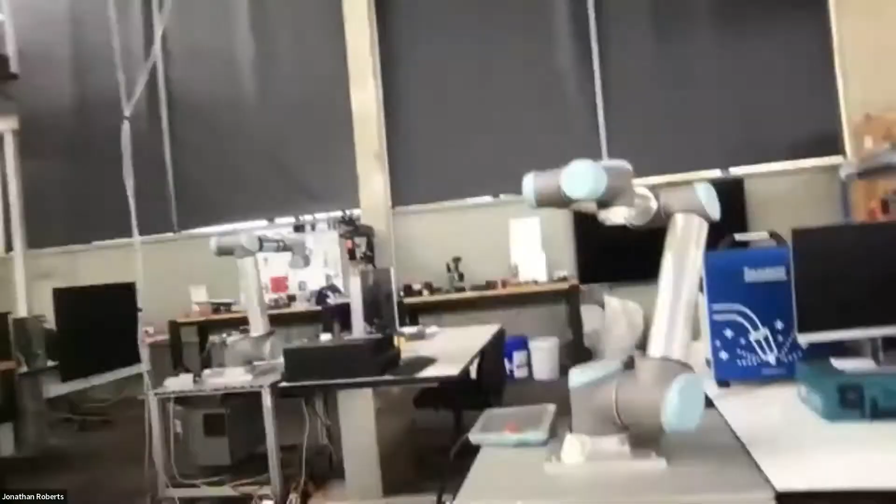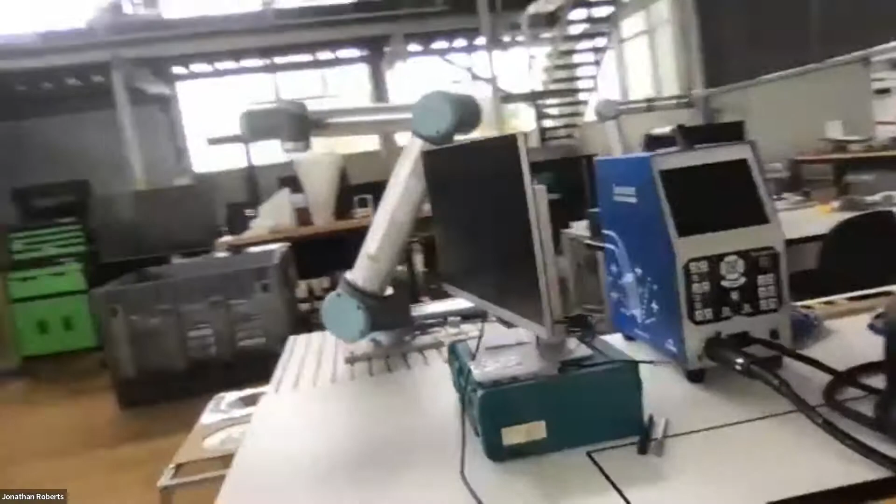Okay, so this is our prototyping space where you will see some things that you probably do recognize as collaborative robots. So these are relatively small robot arms that are sold as collaborative robots, meaning that they are relatively safe to have people nearby. So we've used this space to test new techniques. In fact, you'll see some Weld Australia provided kit over here. So Weld Australia are one of our partners. You can see their augmented reality systems, which no doubt many of you have used. We won't talk about them in detail now.

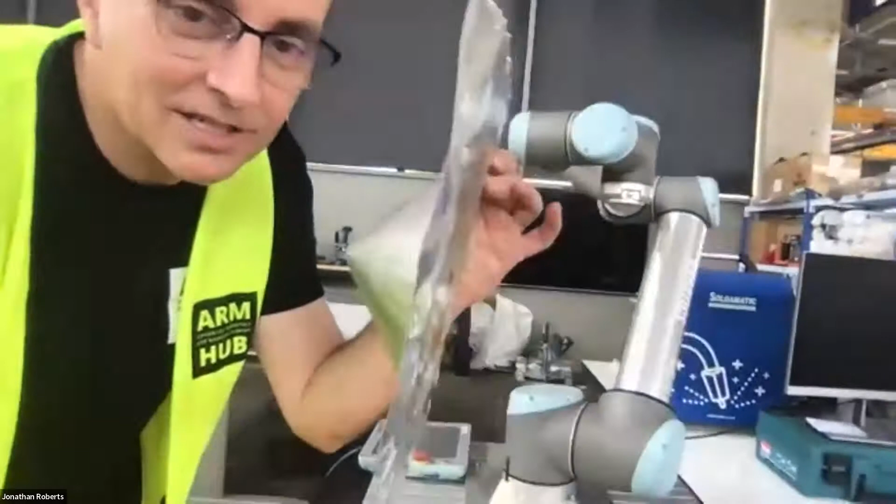I just want to show you a couple very quick projects. This robot here has been used for a thing called incremental sheet forming. Believe it or not, this robot made this piece of metal here, this cone. This started as a flat sheet.

We've then put this pick on the robot, and it's just a steel rod with kind of a ball on the end, and that's used to press against the metal and do incremental sheet forming. So that's one example of where you would use a collaborative robot.

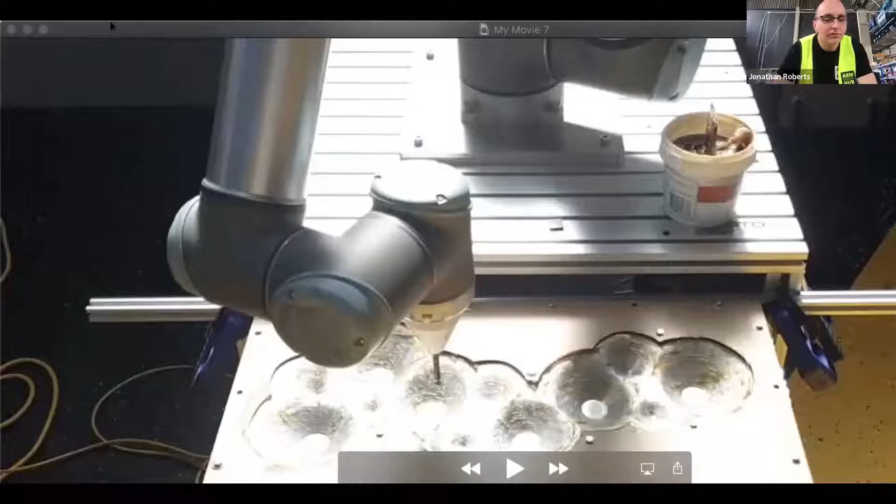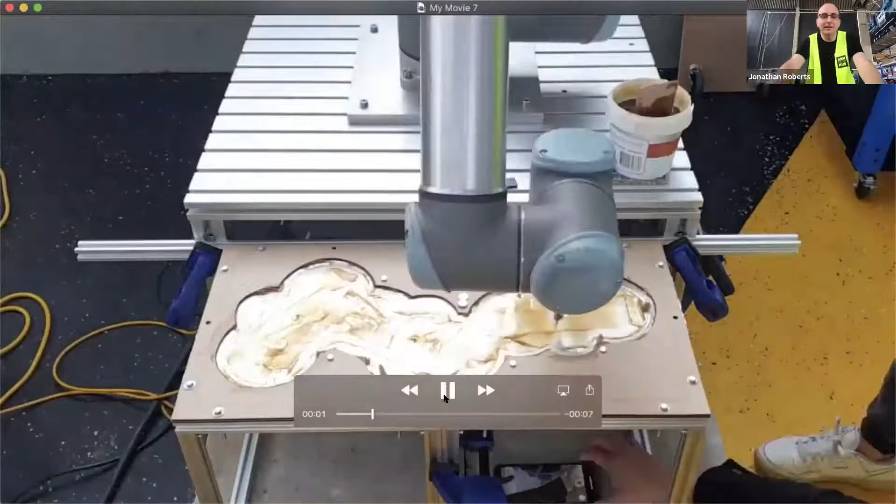I'm now just going to see if I can share my screen and show you a quick time lapse. Let's have a look, see if this has worked. Just bear with me for a sec. Okay, here we go. This is a time lapse of incremental sheet forming. Over about an hour, you can see this collaborative robot performing this task.

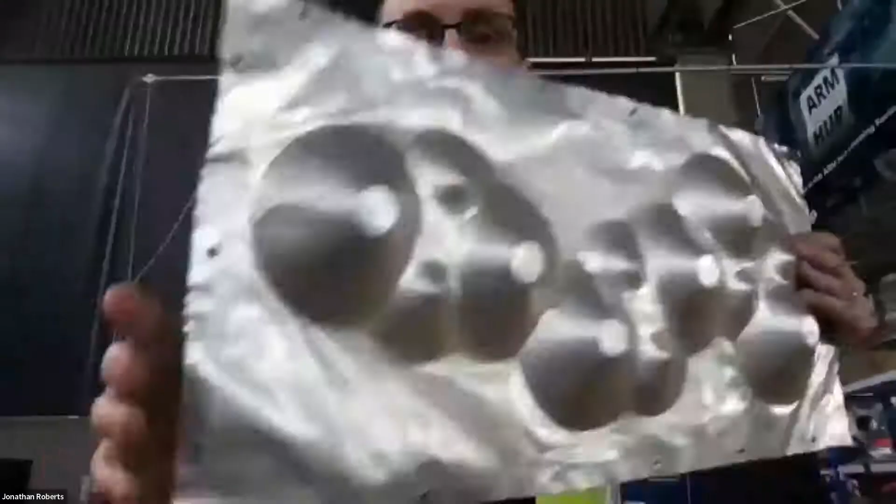These sorts of robots and techniques can be used for one-off things, which means people are still very much involved. In this case, someone is involved in the programming, and somebody tending to the robot, sort of lubricating things. This is the output of what you just saw in that video.

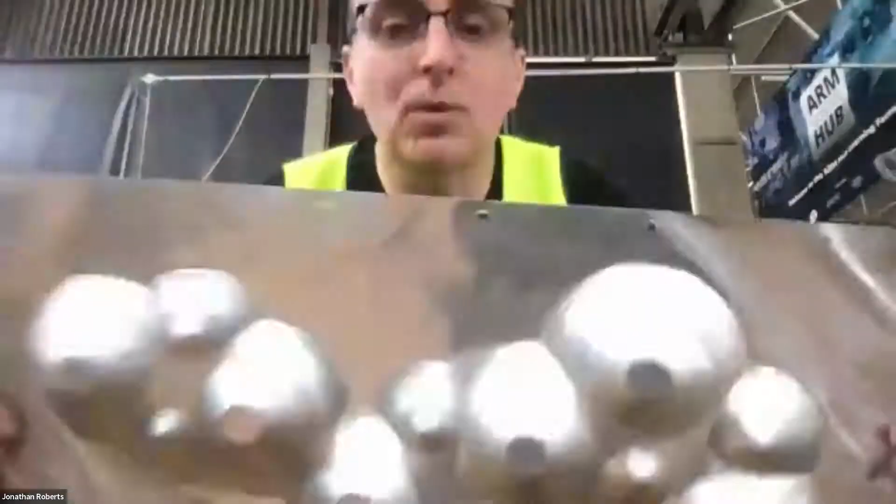This can be used for all sorts of different things. It could be used for decorative purposes, but probably these sorts of things are going to be used for molds. If you could lay composites in there, you can make composite materials with a couple of these sheets and other things in between. You can start to see how we're using these new types of robots to do different tasks.

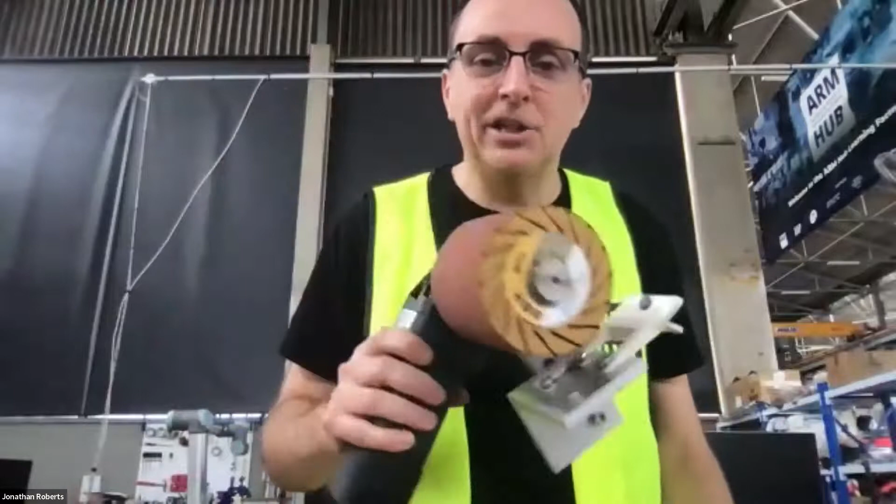Now I want to show you something that really got us inspired a few years ago. You can see this tool here, a linisher. Linishers are used by metal workers against a metal sheet. It's backbreaking work. It's the sort of job that the person who would normally do this manually can get a collaborative robot to do. Let me show you this project.

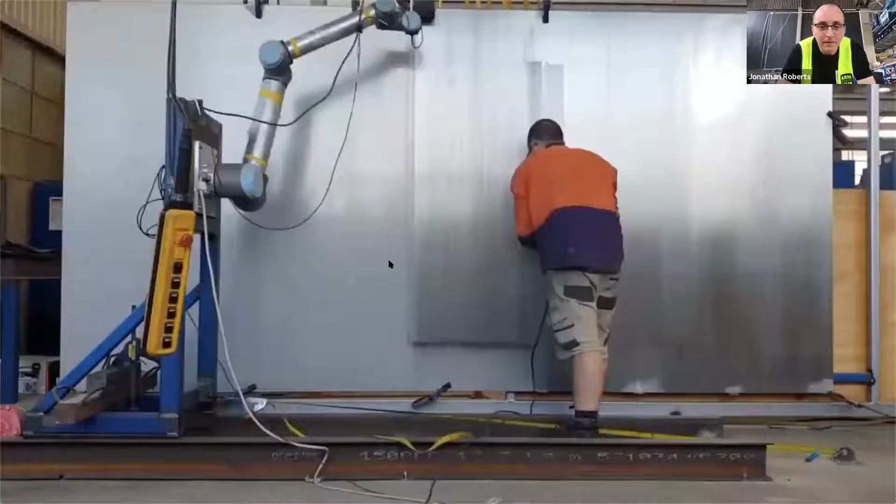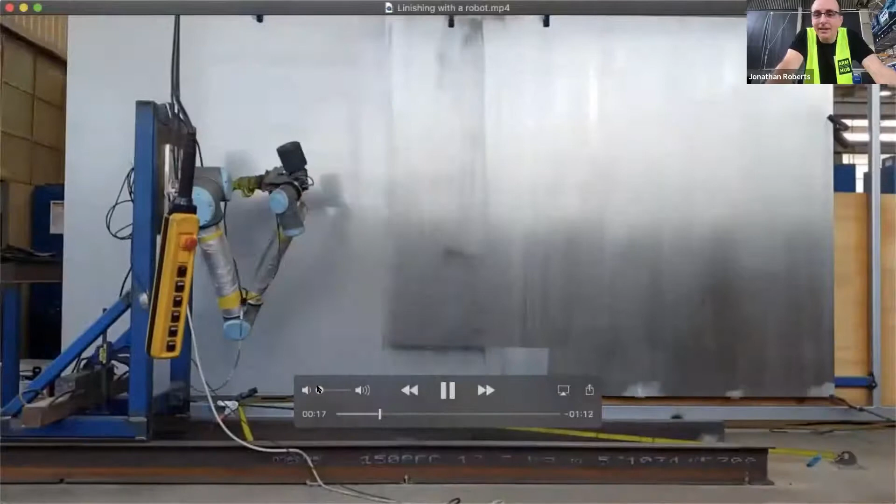Right, so you can see here a time lapse. This is a metal finisher, Matteo, who works in the shed next door to the ARM hub, at a company called UAP. He is working here alongside this robot.

He actually co-designed this solution with one of the ARM hub's engineers, who was working for QUT in a project back then called Design Robotics. She and him co-designed this whole system in the space of 3 days.

So they went from concept to this video in 3 days' time. They designed the brackets, they manufactured everything, they decided how to program it, and it took a job that would normally take him 24 hours on the tools down to about 8 hours in total.

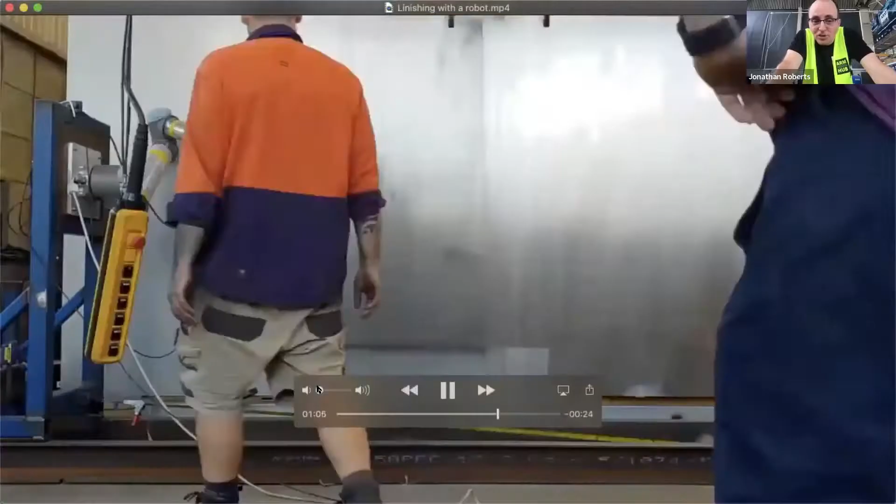And of that 8 hours, 6 hours was the robot, with Matteo tending to that robot. You can see him changing the sandpaper drums, lubricating the sheet, actually dragging that frame, because they only had 3 days they didn't motorize that frame, so he dragged it along sideways when it needed to move.

He spent 6 hours of that 8 hours doing that with the robot, and then he would spend 2 hours doing it the old way, fixing up the bits the robot missed. At the bottom of that video, there's a whole lot of missing spots because they didn't get it perfect the first time. So it went from 24 hours of him on the tools to 2 hours of him on the tools and 6 hours of him working with the robot.

And then they replicated that. I think they did 6 sheets for this particular job. So this is one of the prototype projects that showed us the benefits of these robots, and particularly working with the expert in whatever the trade may be.

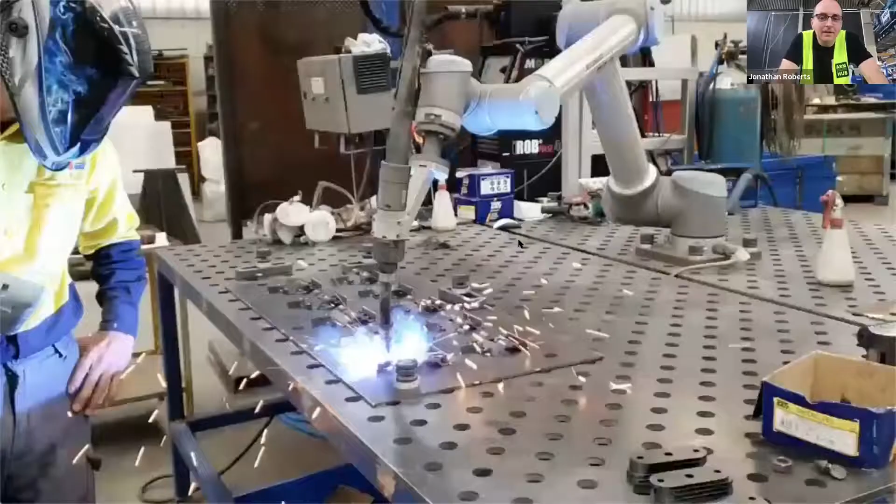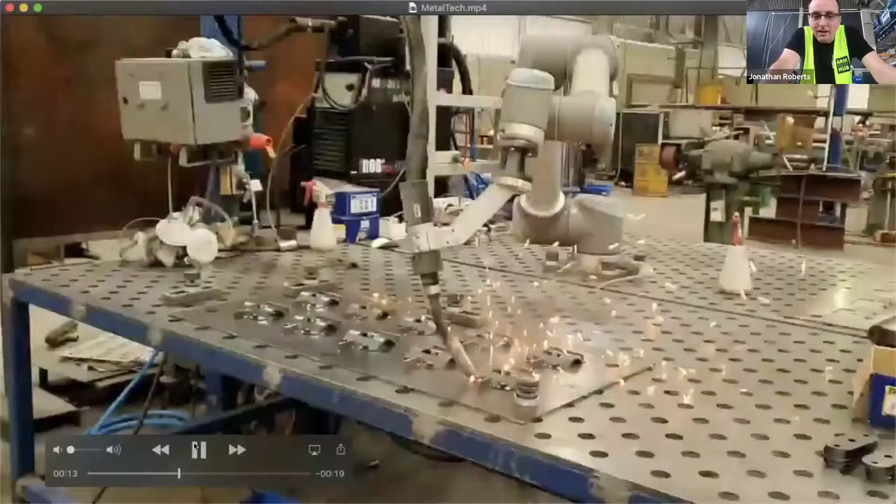Now, because you're obviously all interested in welding, let me give you another example, a welding example. This is a very similar project to the Linishing project, in that this company, MetalTech Industries, had a problem where they needed a collaborative robot to do this welding. In fact, the same engineer, Amelia, went to the company and helped them integrate this system. This was a 2-day piece of work.

Helped get the metal worker there up to speed with the programming, made sure that they understood exactly how to replicate that, and now they're using that in their business. So you can see, relatively straightforward, using these collaborative robots almost out of the box. You don't need much more special stuff rather than just a little bit of training, not a lot of training, to actually use these in a useful way. So they're now setting up this table here where while the robot's working on one side, somebody can be working on the other side, setting up the bracketry and that sort of stuff.

Okay, I'm going to stop the share there. And Merryn, if you could start the slides again, I'll give a bit of an introduction to the partners of the centre. So I think you get an idea now what a collaborative robot is in our terms. It's kind of anything where there's people that are sort of at the heart of it.

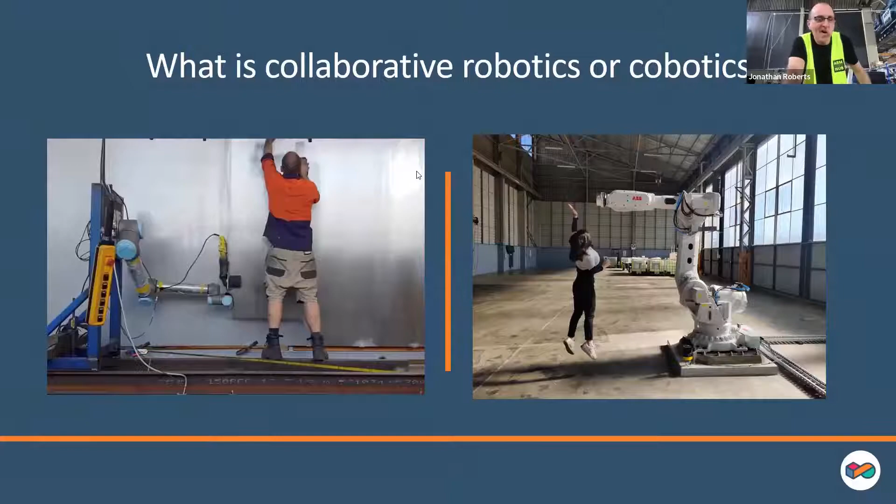Now, if we could get the next slide, please. Okay, slides are stuck. Do we need to start it again? I feel like one of those IT people. Can you turn it off and on again? Any luck? Merryn, do you know what's happening? Okay, I think it's coming up on my screen, but it's not on anyone else's. It is now here, finally.

Good, now it says our objectives. Is that what it says on your screen? Okay, all right, great. Okay, and now expertise. Okay, all right, let's stick with expertise.

All right, going quickly to the partners. So we have on the right there, you can see, so I am from QUT. We've also got university partners from UTS and Swinburne, and we've also got the Technical University of Dortmund in Germany. So they're the research side partners.

And then part of the centre, we have Weld Australia, hence this webinar, of course. We then have InfraBuild, we've got Cook Medical, who are a medical device company, we've got B&R Enclosures, who make all sorts of enclosures, boxes for all sorts of infrastructure projects. You may even have one at your house, it's very common for an Australian home to have their electricity meter in a B&R Enclosures box. Arm Hub, where I am today, and then IR4, who is a software company that makes smart software for the construction industry, particularly of steel buildings.

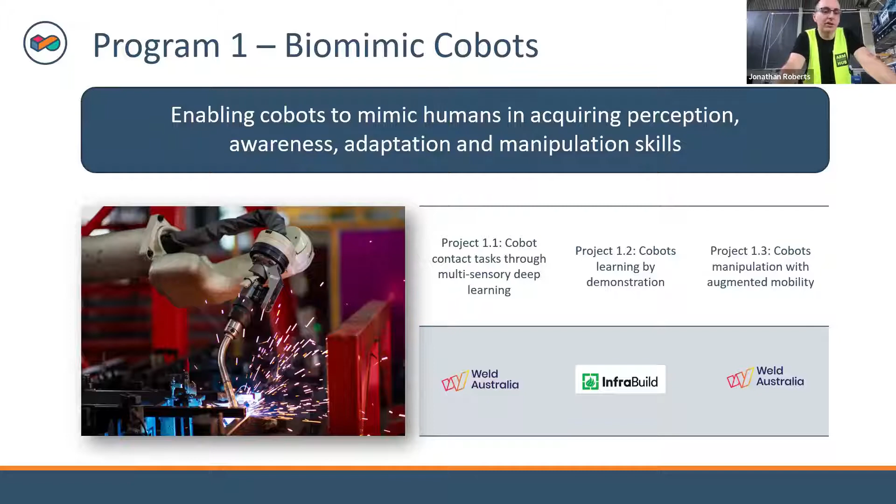So now I will hand over to Jared Donovan, I think, who is going to talk about program 2.

Thanks, John. Program 2 is about human-robot interaction. In our program, we're starting to look more at the human side and how you design these robots so they work better with humans in real work places. We've got 3 sort of research projects that we're working on.

The first one's called Human-Robot Interaction Intention Visualization. That's really the idea that we want human operators to be able to see what the robot might be thinking. This photo here is actually from a commercial product that's available now for forklifts, and it projects a simple beam of light of where that forklift is going. So we want something similar for robots, where if you're working alongside a collaborative robot, you can actually get a sense of what the thing is going to do. And that just, we believe, will help make that human-robot collaboration a lot more efficient.

The second one is a human-robot interaction prototyping toolkit. You can kind of think of this as like the Lego kit for making these new kinds of robot interactions. One of the things about robots is they're complicated, sophisticated engineering machines, and we need ways to test out these new ideas that's quick, efficient and lightweight. So like a Lego kit of parts, the idea is to make it easier to prototype and test new designs. The sort of thing we might do is actually create a virtual reality simulation of a robot before we test it out in the real world.

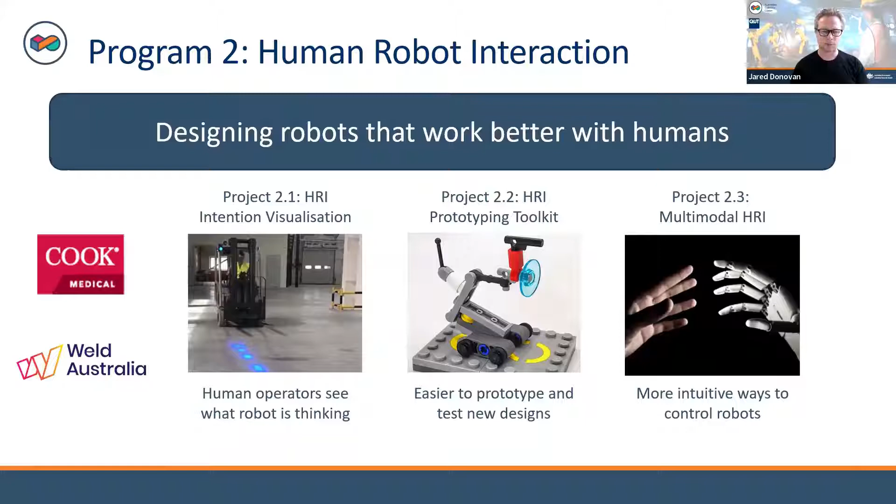Hello, everyone. Thank you. So program 3 is about designing socio-technical robotic systems. There are some overlaps with the other programs. This one looks at designing the manufacturing systems, the products, and the spaces that will help connect humans and robots to work together.

So the first project focuses really on human factors. In that project, we'll look at the knowledge, the interests, the motivation, but also how the human fits within that robot and manufacturing system to better create and develop these systems that address the needs of the people.

on the workshop floor. The second project is about design factors. Here we look at the needs of the human, but also the needs of the product, the workplace, and the cobot. And again, how do we create an environment? A spatial environment, but also what are the tools required to make the system work? And also other principles that will need to be implemented to really make the human and the robot work successfully on the workshop floor.

The third project is about AR and VR factors. So learning from the human factors and the design factors, we see that the AR, VR virtual space can be used to simulate, to prototype, to evaluate how these systems come together, and to really bring the human into exploring how the human and the robot can work together within that manufacturing context.

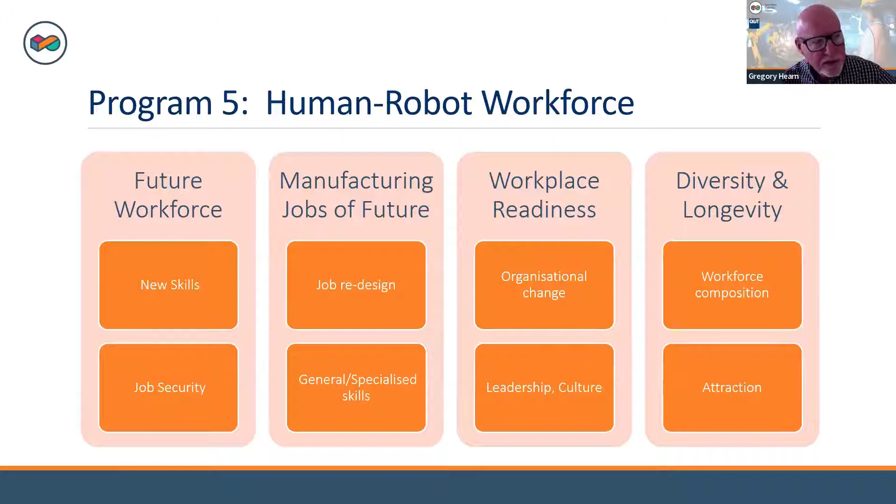We actually have a question here from David Wilton. David's question is he's interested in some of the things we've been talking about, and who should he be talking to about being an industry partner.

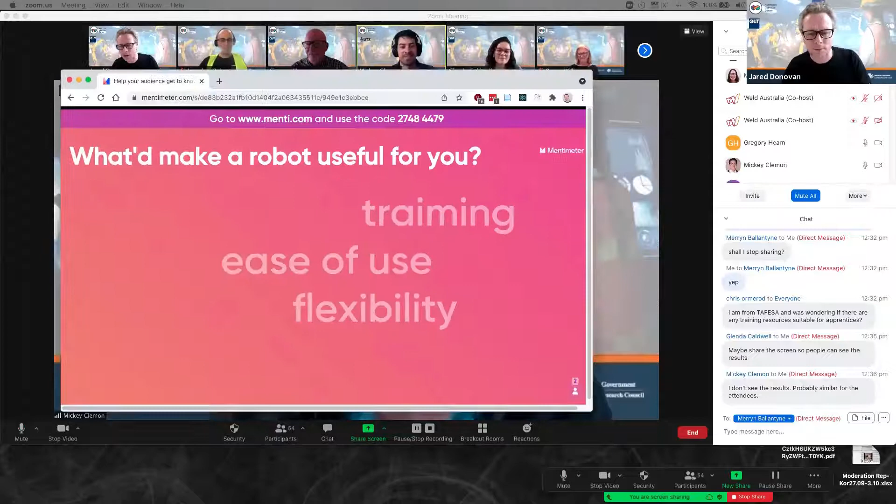All right, so the next one, again just to get the conversation started, the question here is: what would make a robot useful for you? When you click through, you should see 3 places where you can type in answers, but what are the things that would make a robot useful to you? Sorry, is that not showing up on the screen? Okay, thanks for letting me know, Glenda. Here we go, sorry about that everyone. Is that showing now? We see Greg, in your screen. No, okay, try again. Yep. Good, all right, that's better, thanks for letting me know. Zoom newbie mistake there. Okay, so yeah, what would make a robot useful for you? So far we've got training, ease of use, and flexibility. I'll post that link again in the chat.

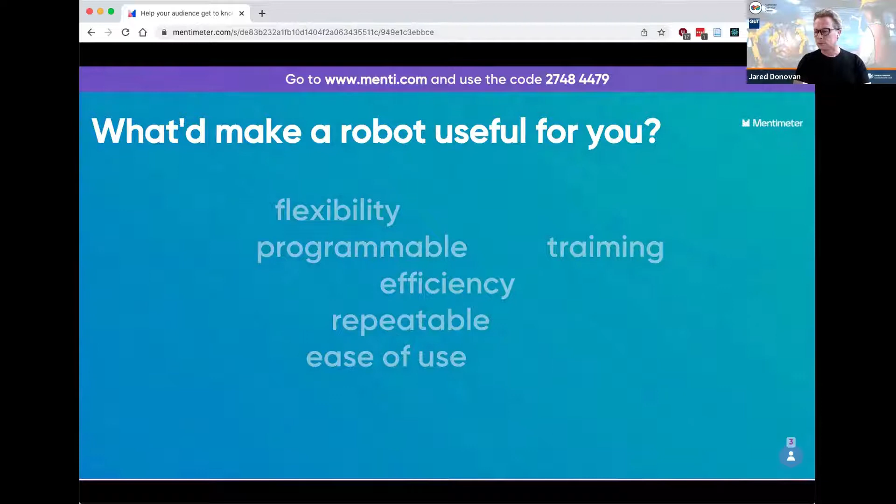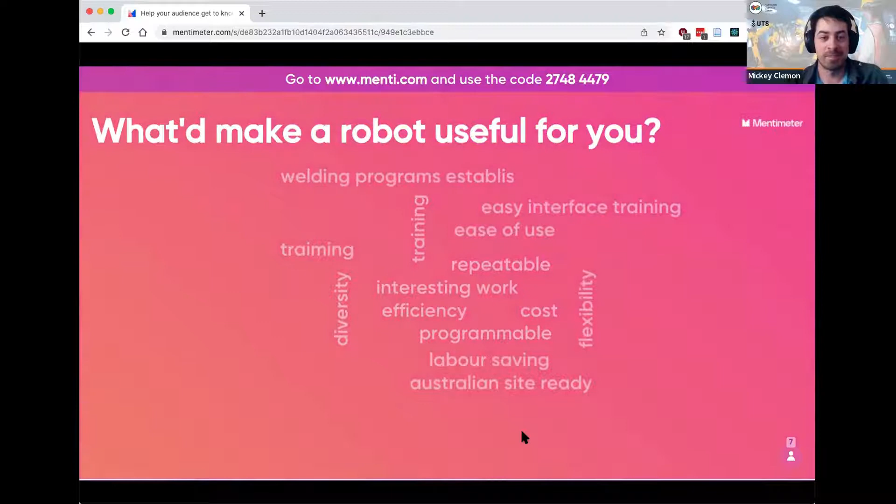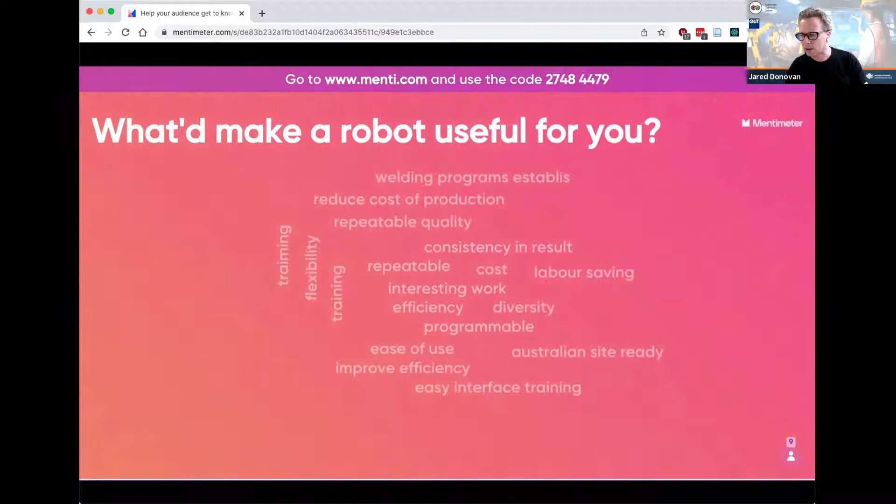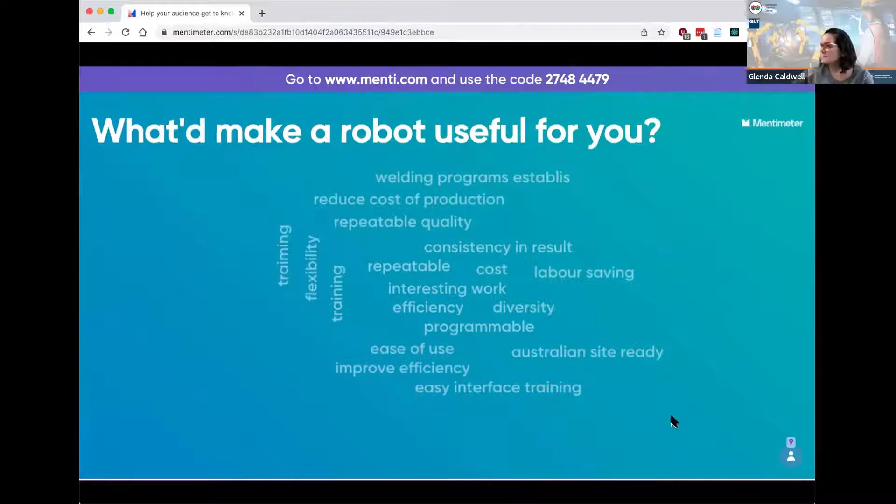It took a minute, I was wondering when the efficiency of the labor savings would come up, but the reason we started developing robots however many years ago was to save people time and effort. I was wondering when that would pop into there. That comment on Australian site ready is interesting, I wonder what the specific needs of an Australian site are. Also interesting, I don't see health and safety on here yet. I like the comment about diversity, that's interesting too, wonder what people think about that one. Mark Potts has put some answers straight into the chat, and that's a good idea too, Mark: dust, water, IP ratings, load ratings, etc. Good points.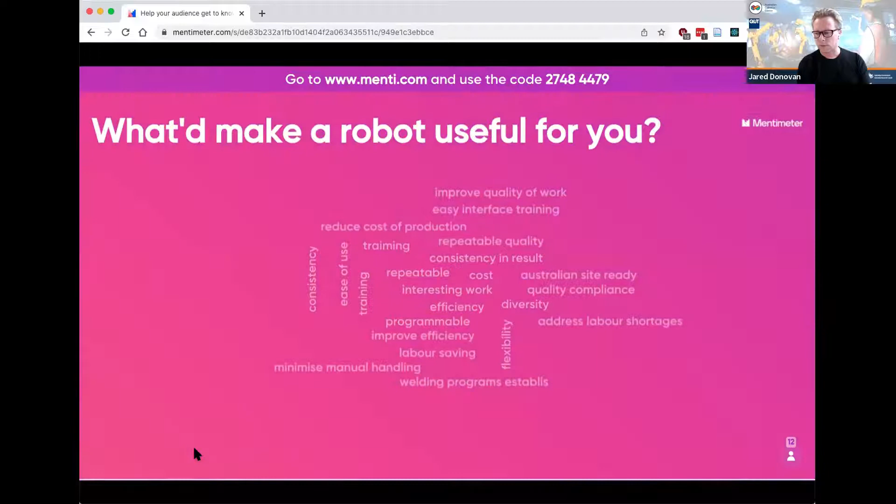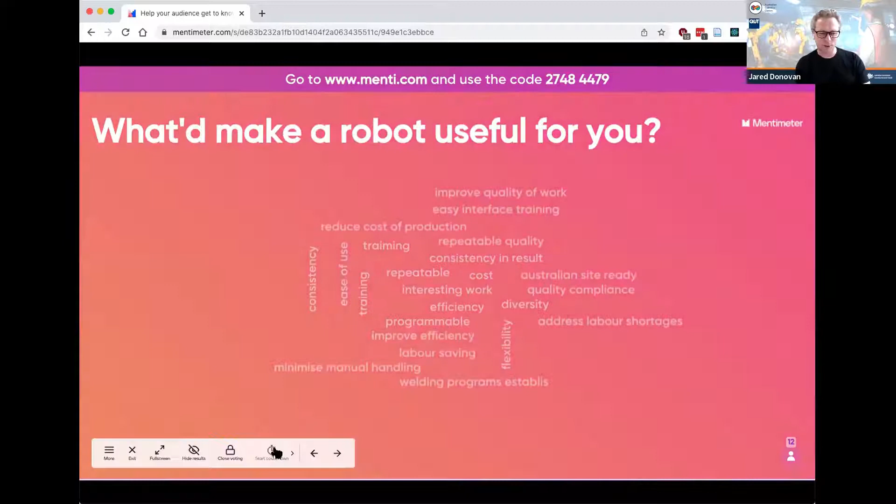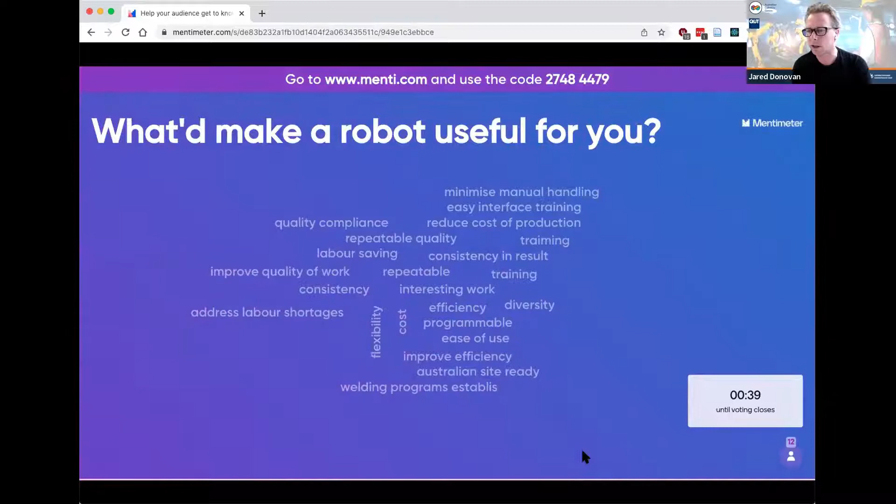Very exciting. So Greg, how do you want to handle this, because we've got time for a good Q&A. The idea was just to give people some thinking, to start those questions flowing. I can see there's one from David Wilton already. Shall I hand back over to you? Do you want to leave this up on the screen? Yeah, once we get this one closed, I think we can open it up to questions, and I've got some for the program leaders as well, and get people to join in.

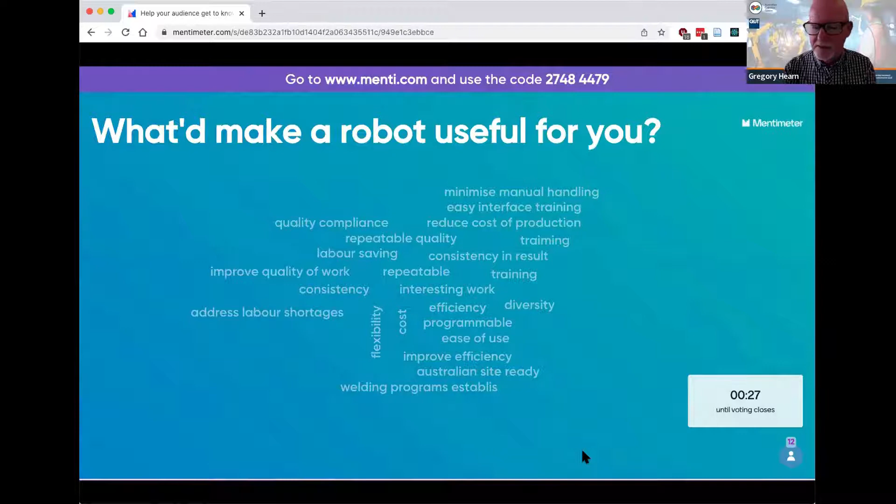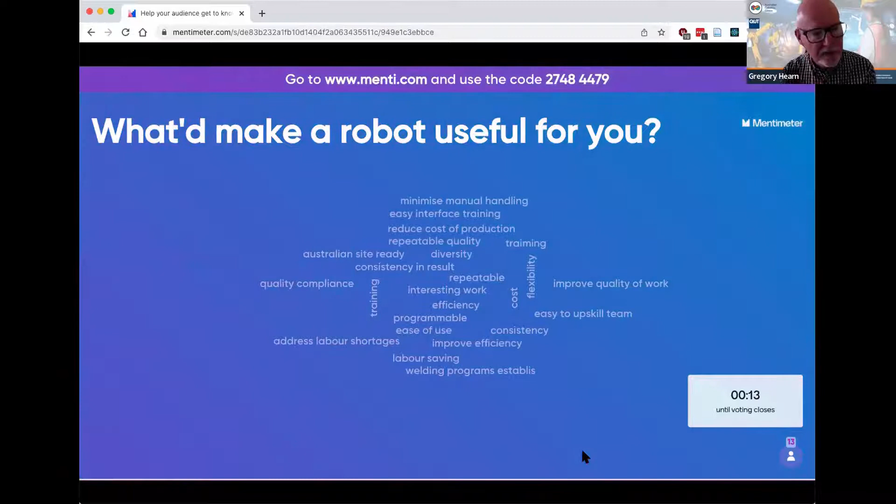I think that's a really good spectrum of what we're finding every day when we talk to companies about why they're contemplating using cobotics or robots in general. One of the things that stands out to me is this interesting work angle. We hear this a lot from people when they're talking about robotics: it's not replacing people, but enhancing the interesting parts of work. So that's really nice to see.

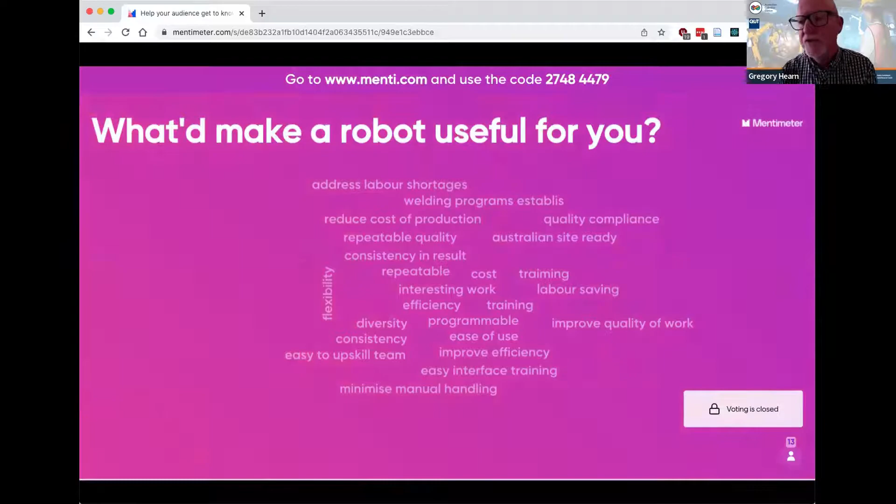So I might start back with you, John, about the question of how do people get engaged with the centre if they want to, or indeed if they want to become a partner?

So first of all, yeah, email me. Google my name, Jonathan Roberts, at the centre or QUT, and in the first instance I'd just love to chat. It'll probably be a three-way chat between Weld Australia, myself, and whoever's getting in contact. But yeah, absolutely, I'm quite happy to do one-on-one Zooms and see what your needs are. We're talking to a lot of businesses, and they're all very different. Just to see if we can help. Basically, don't want to waste anyone's time. So a one-on-one chat with me to start with.

Okay, so we've got another question here from Johan: case studies where cobots are used, and what were the reasons for the implementation? So there we've got quite a few examples, I think, of case studies from the Robotics Centre originally. So who would like to mention a couple that they might have worked with? John, do you want to start on that one?

So I can start with that linishing example and motivations for that. The motivations were twofold in that case. One was to speed up the process, because the company had to meet a certain deadline. They thought doing it the traditional way wouldn't meet the deadline, so they invested the time. Even though it took time to do this new implementation with a cobot, they thought that would save time overall, and in fact it did. But the other motivation, and I think really the very serious motivation, was health and safety, and just having less wear and tear on Matteo, who was actually doing the work. He was having to do physio, and it's just a backbreaking job, right? So health and safety plus speed and efficiency was the motivation.